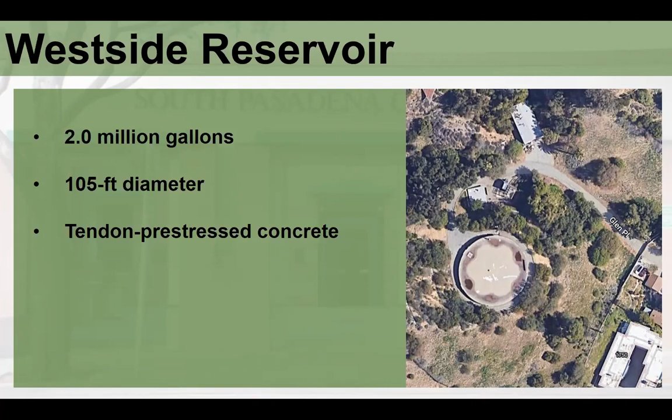And it's the oldest reservoir in the city. Most of the other reservoirs have been rebuilt in recent years. Next slide, Raina, thank you.

So the evaluation was conducted in several phases. First, there was the document review in which we provided the consultant with the as-built drawings of the reservoir. They took that information to include in their seismic and structural evaluation. But before they did that, we had a geotechnical survey company come on site and conduct borings into the ground. So they drilled 2 holes into the ground, both to collect soil and also to determine the different levels of sedimentation of soil and rock structure below the surface.

The next part included a dive inspection. So with the reservoir filled, we had divers who are sanitized so they can enter into this drinking water reservoir to dive underwater and actually inspect the floors, the columns, the walls, the ceiling, and also all the other pipe work and other components inside the reservoir, and give us a condition report on those elements.

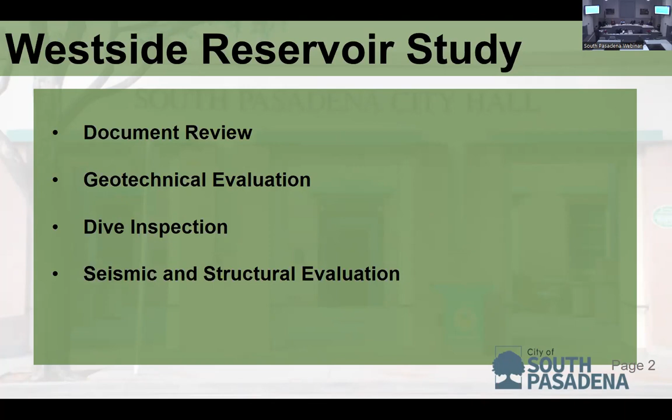And then lastly is the seismic and structural evaluation. So taking the information from the geotechnical, collecting the information from the internal condition and the external condition of a walk-around site inspection, as well as the as-built drawings, applying building codes, and then taking a look at other information available, such as nearby soil information, fault locations. The consultant conducted an overall comprehensive evaluation of everything in order to give us some recommendations about the condition of the reservoir and essentially next steps. Next slide, Raina, thank you.

So as I mentioned, the inspection components, if you could think of this thing, it's basically like a can, like a tuna can. So it's got a floor, it's got a ceiling. Basically, there's a flat floor slab, which is built on top of a ring footing. And then on top of that is an interior wall. And then there are tendons wrapped around that interior wall. And then there's an exterior concrete wall around that. And then on top of all that is a roof. And there's 7 columns inside the reservoir, 1 in the center and then 6 around it.

So as you can see from that earlier picture, the reservoir has this sombrero effect, where there's some sagging in the roof because it's still supported from those columns. They're still intact, but the areas between the columns and between the walls are sagging. So all in all, the evaluation showed that many of those components are somewhere between poor and fair condition. There are elements of the reservoir that are in good condition. The floor, for example, was intact and in good condition.

The exterior walls were in poor to fair condition. The interior walls were in good condition, and then the roof was in poor to fair condition. And so, for example, you could see that for the ceiling, there's concrete that's spalling, that's breaking off in little chunks off of the ceiling, and they found those during the dive inspection on the floor.

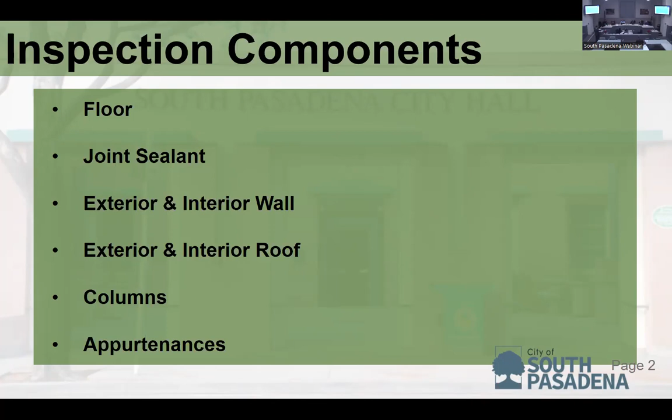So here are some of the photos. On the upper left, you can see this is outside of the reservoir. You can see that ceiling that hangs over the exterior wall, and you can see the joint sealant and some gaps there. In the second column of photos, you could see some of the concrete damage and spalling. And again, the exterior is in poor to fair condition, but they think the interior wall is actually in better condition. And then you can see on the bottom, second column, there's some spalling. That chunk of concrete is coming out. And that usually occurs because the rebar is corroding.

And so when that rebar corrodes, it creates an oxidation product that sort of pops the concrete. And then once more water gets in there, it can fall off. So it hasn't failed, but you can see that it is in the process of decomposing, of failing.

Ted, just a question. Yes. How thick is the outside wall and how thick is the inside wall? Sure. I think the outside wall is 6 inches, 8 inches, and then the inside wall is 4, 6. The whole thing's 8 inches. Okay, yeah. So I think it's somewhere between 4 or 6. Yeah, something like that. Overall, it's 8 inches. Yeah. Thanks.

So in the third column, you can actually see one of the internal columns, which were in relatively good condition. None of them have failed. And then you could see on the bottom, there's the floor where we see debris and little chunks of concrete that have spalled off the roof.

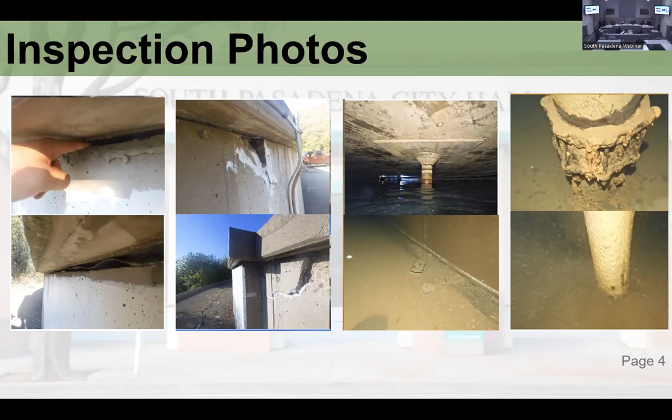So the second step in the evaluation was the geotechnical analysis. There's a very comprehensive geotechnical report attached to the overall seismic and structural report. At the moment, we have a draft report, and we're evaluating the report author's comments, and we'll be finalizing that report. And with your recommendation to move forward, we'll bring all that documentation to council, release the report to the public for review, and then move on to the next step.

So what that means in terms of the stability of the reservoir is that though we would have concerns about the stability of this slope because it's a hillside developed structure, during a seismic event, we don't have as much concern. There's a negligible amount of concern with regard to slope stability during a seismic event.

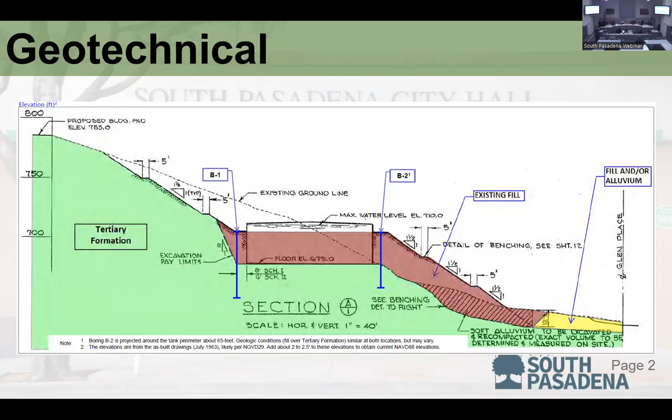Okay, let me jump to the next slide here. So those are all really brief overviews of the different segments of the report. What's the depth of the tank right now? It's about 30 feet deep into the soil. 30. Yeah.

So in taking a look at the condition and the seismic response of the reservoir during an event, the reservoir was essentially built to handle its static loads, meaning it can handle the water that's contained inside it, but during a seismic event, it isn't built up to current standards. So in order to retrofit the reservoir and repair all of the components that you saw that were failing, those costs actually approach the replacement cost of the entire structure.

So from a cost perspective and from a building code perspective, the consultant's recommendation is to actually replace the entire reservoir. And we'll get into the costs on that in a couple seconds here.

And as I said, it was essentially designed and constructed not just to 1961 building codes, which are no longer relevant, but it was also designed and built prior to AWWA adopting design standards for this type of reservoir. So as I mentioned, it's overall poor to fair structural condition. There are some good components to the reservoir, but largely we wouldn't classify the entire reservoir as in good condition. And as I mentioned, the repair costs would approach the replacement costs.

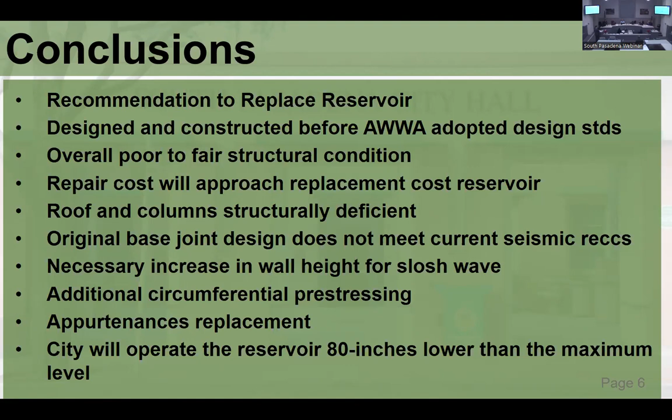So let me jump to the next slide here. And to prevent the wave, and I'm not an engineer, could baffles be built inside to prevent a wave structure from building up? And if you fill the reservoir all the way to the lid, do you not eliminate that wave? Sure. So it's not so much breaking the wave that's the issue. It's the force of the wave itself.

So even if we were to install any type of baffle structure inside the reservoir, that structure would be subject to the pressure of the wave. It might take some of the force off, but we would still have that force moving inside the reservoir. And filling the reservoir up to the top doesn't necessarily compress that wave. It still jostles that water around enough that it would swing around and knock the top off. So really all we could do is reduce the amount of water and reduce its ability to rise up in that way. Thank you. Of course.

So before we get into the next steps and the recommendation, these are some of the replacement costs estimated by the consultant. So all in all, they estimated a little over $6 million for the replacement of the reservoir. You can see that includes the structure itself. But a lot of the costs here are actually due to the location. In order for us to replace this reservoir, because of the limited footprint of that location, Commissioner Trevino, yes.

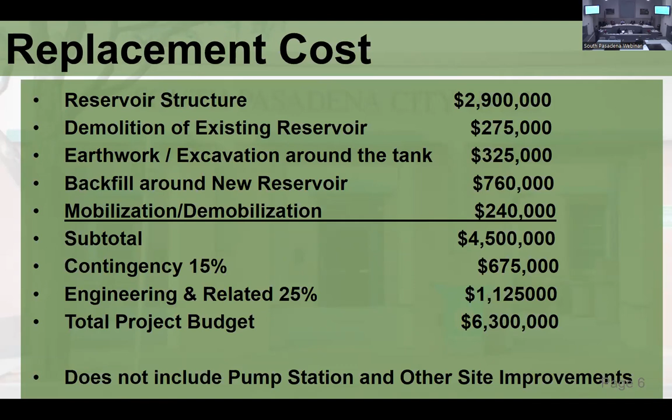And there's no estimate on the cost of that. We think altogether, the whole site would cost about 15 million. Well, I think we put like 15.5 or something like that in the budget. So how do we get there? Let's jump to the next slide.

So we're looking at, to get to construction, obviously we have to go through design, and to get to design, we have to know how this is going to come together. So what the consultant is recommending is that we move on to a preliminary design report. And what that would do, basically give us a roadmap to get to design and construction. If we're going to bid out a design package, we'll want to have certain parameters in place for that designer on how we want to go about the construction.

So these are the types of things that we need to evaluate ahead of time before we move into the design process. So we don't have an estimated amount for this preliminary design report yet. There's other things that we want to consider, including energy, power backup, site security, other types of improvements that we want to make that might increase the efficiency of our operations. And then we also want to try to expedite this project as much as possible.

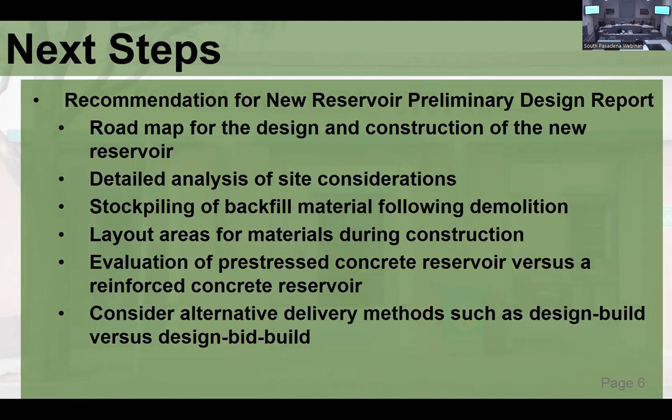So this is my first presentation back since I think December, so a little rocky, but thanks for your patience. But any questions you have, glad to answer them.

So, Ted, let's talk about this. With regards to your inspections, it said poor to fair. So I think you would conclude that it's important that we do a replacement. And from what I'm understanding, we should do a replacement sooner than later. There's obviously residents that have been following you that are also supporting this accordingly. So number one, I think you're in agreement that we should move forward, and you're going to be making this recommendation to the city council. Talk to us about timing once the city council gives you approval to move forward.

And then lastly, would it be the same type of design, or is there a way to incorporate, because I'm looking at that big piece of real estate, me being in real estate, I'm like going, hey, can we bury this reservoir and turn this into a park? I don't know if that's something that can ever be done or can be incorporated in the design, if it's a necessity or an amenity that we could do. I always think amenities for the residents. So I just wanted to throw that out there too.

So again, since I think you want to move forward on this, what would the timing be once you get approval from the city council? And then what type of alternative designs would there be? Sure. So those are good questions. So I think this report took us about 4 or 5 months to bring together. And there was a lot of technical evaluation. This next report would be sort of an evaluation of best practices. So it probably is that timeline or a little less, a few months or so.